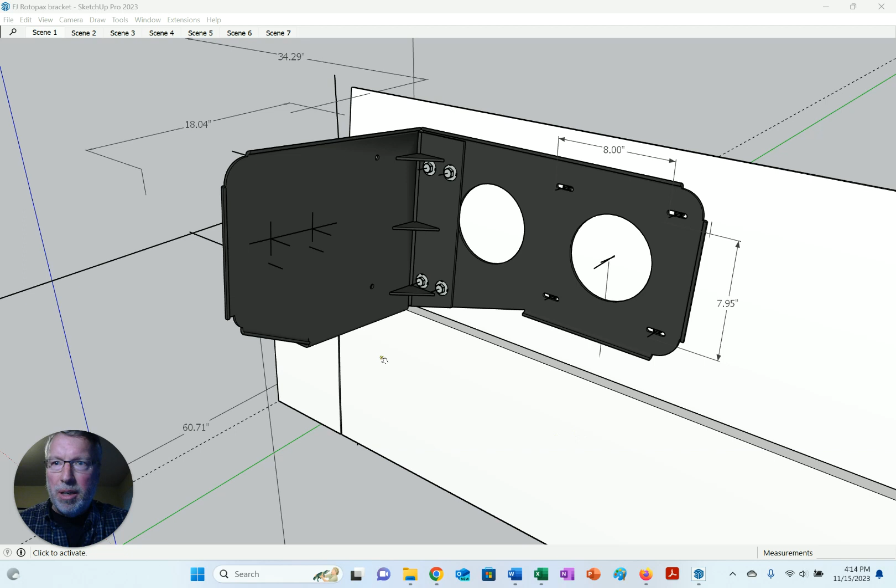And by the way, this back thing is my very rough take on the door of the FJ, which is curved, a little funky. I'll show you when I animate this kind of what I'm talking about in terms of how this actually works. So let's go to the next scene.

Okay, so now I've added the actual spare tire, and let me turn off my phone. It's already off. Good.

I'm showing this as a 33-inch spare tire. Right now I've got 32s on there, which is just the standard OEM size for tires for the FJ. But I'm going to be upgrading to 285 70 R17s, which are just under 33 inches. Call it 33, to be safe.

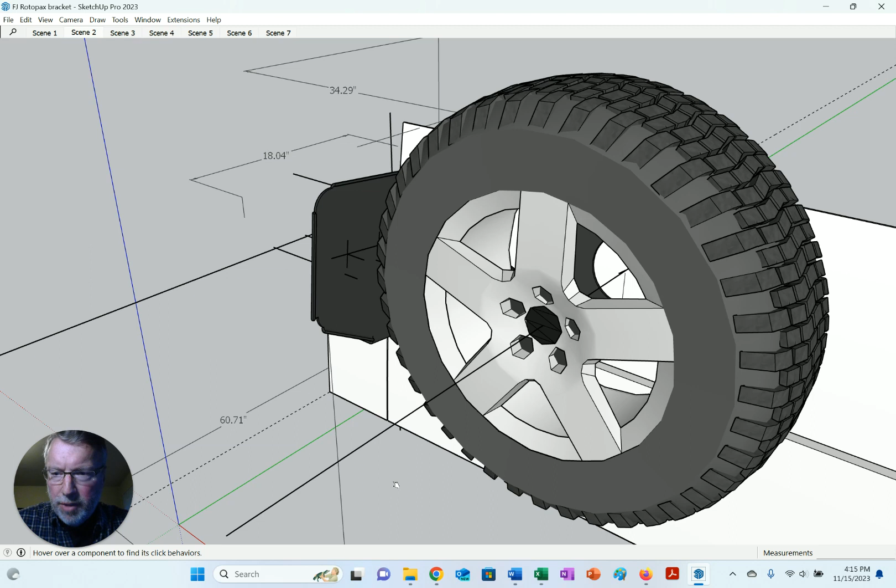Okay, let's go to the next scene.

So this is the other side. Part of this piece that gets bolted to the first piece has a little shelf with a welded gusset on the back, just to reinforce it. This not only provides some additional rigidity to this piece, but it also provides a little shelf and support for the high lift jack. So I'm going to show that next.

And by the way, all of this is relative to the tire, which is actually pitched back slightly. I don't know exactly what it is. I've guesstimated a little bit just to show from a drawing perspective, just to show the relationship between the two. It's not super critical.

In terms of what that is from a building perspective, because it's just going to mount to the door, it just needs to make sure it clears anything on the vehicle itself, including the part of the quarter panel that is not hinged. So anyway, let's show that high lift jack.

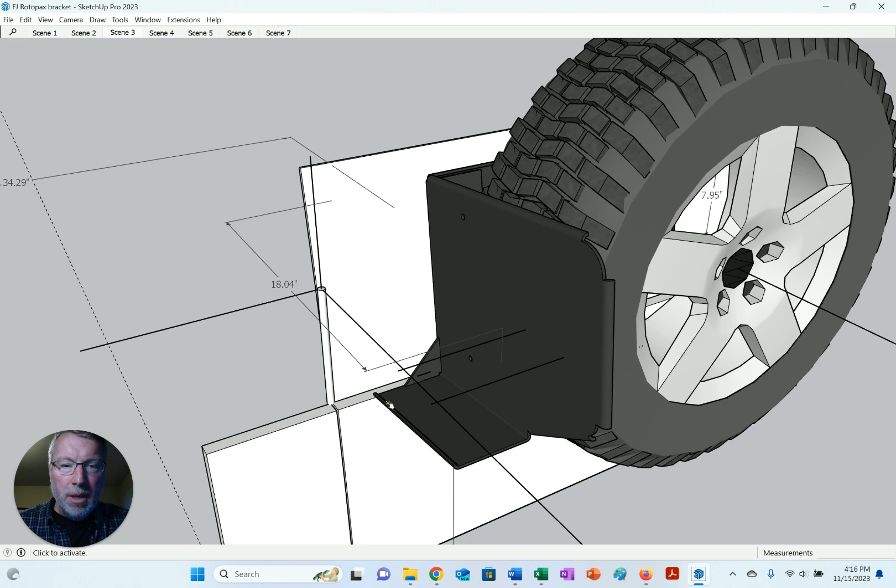So the high lift jack is going to sit on top of that shelf, and it's going to be bolted with eye bolts through the holes in the vertical portion of the jack into this vertical panel. I'm not sure how I'm going to lock this up, or whether I even will. I don't know yet.

When I'm not camping and just driving around in the FJ, the high lift jack will not be on the vehicle. It's only going to be on there if I'm going off grid or camping somewhere, and I know I'll need this for insurance purposes. So anyway, that's another thing to think about—how to lock this up.

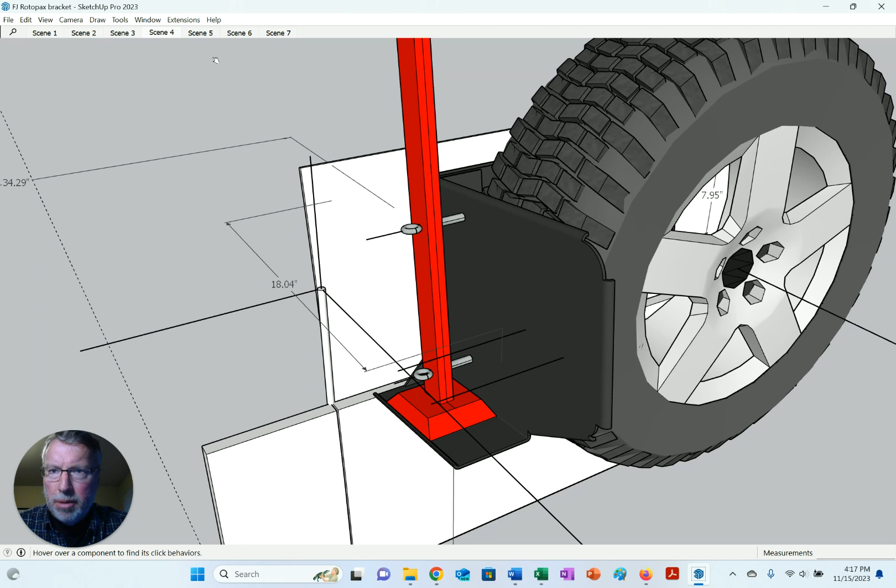So this next scene actually shows the RotopaX on there. It just kind of sits in front of the high lift jack, and it projects out a little bit, but not too badly. So let's show this actually rotating.

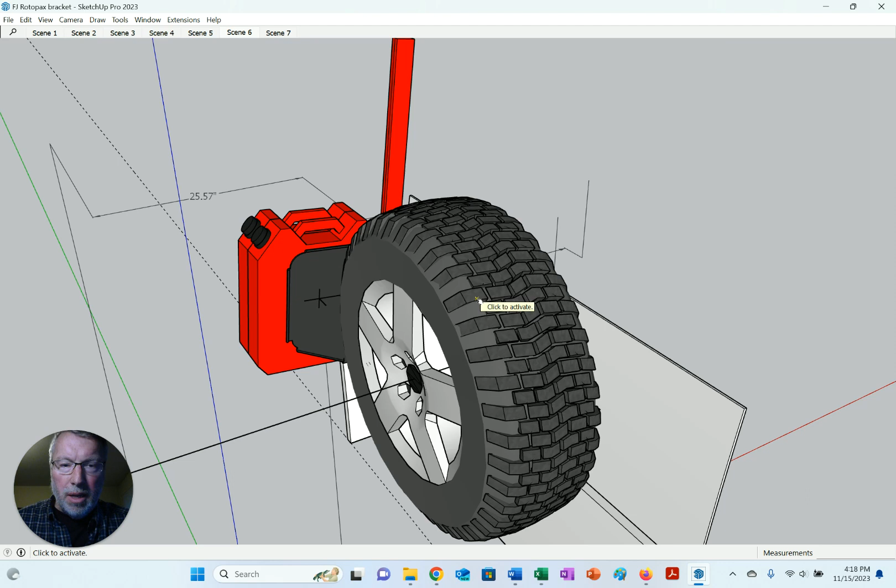You can see that the whole door hinges. On the next scene, you'll kind of get a sense of what exactly this means. So let's go to the next scene.

So this is actually a 2D view, which I always like to look at both in 3D and 2D, because it helps me understand two-dimensionally just how all this stuff is working. When you look at this, you can see the angle of the carrier versus the tire, which is close to vertical, call it vertical. But this has to be inclined because it follows the curve and angle of the door.

That's just the nature of the FJ. It has a kind of curved back door. It's actually really nice. Not going to really impact the design, but it's interesting to see this. I can actually animate this, so you can kind of see what happens there.

One of the interesting things about how this back door was designed - Toyota's engineers really have it going on, because this is a very complicated door. I've spent some time looking at it. It's very complicated. There's two hinges, top and bottom.

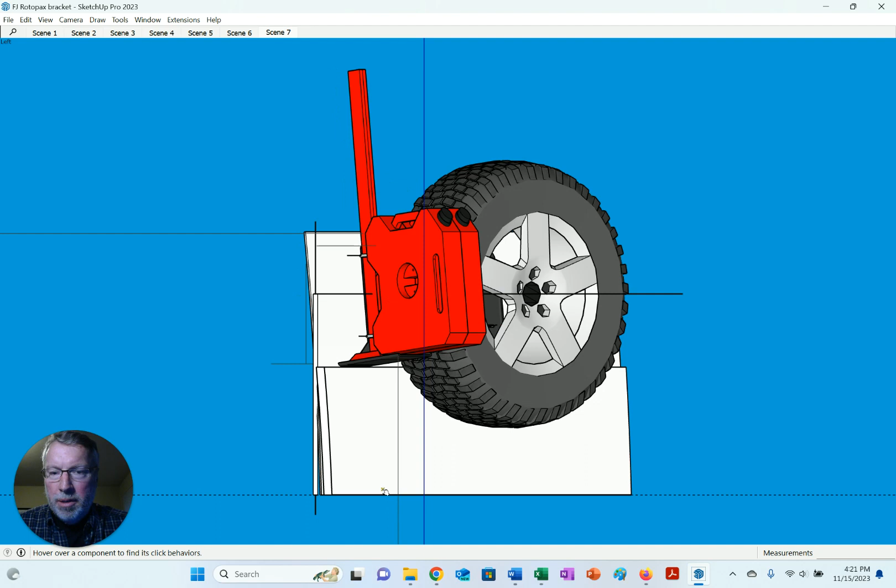Anyway, it's a really interesting hinge arrangement. So when the door opens, the bottom corner near the hinge is actually inside the plane of the door, or the opening of the vehicle that it opens out of - the top of it is outside.

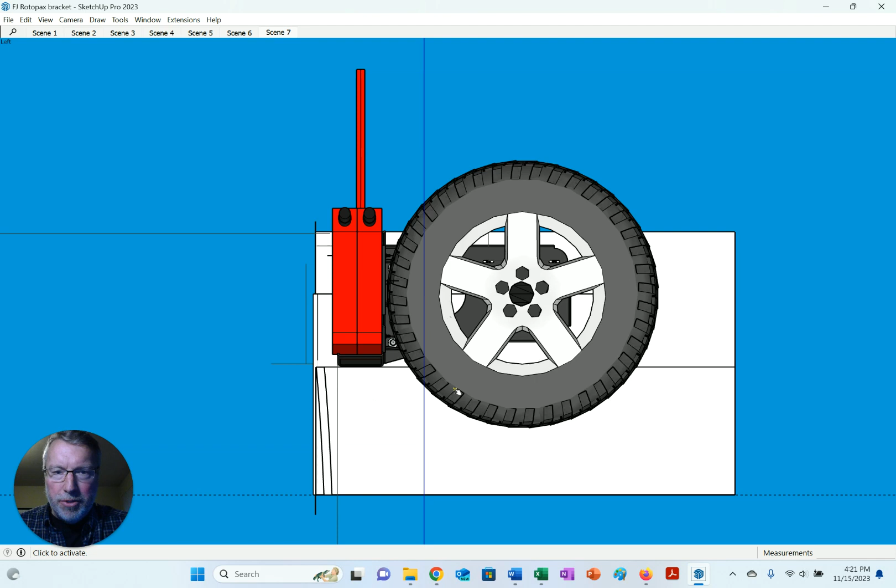So it's really kind of interesting. It's not the easiest thing in the world to draw, but I took a stab at it. I think it's pretty close.

So yeah, this is something we're working on. I don't know whether this is going to turn into a product that we're actually going to try and sell. Once I get the prototype done, get something that actually works, and get it on my vehicle, then I can take a lot of pictures. I can do some real world testing, make sure it's strong enough, make sure it's not going to break, and then just kind of share all that stuff and see if there's anybody that might possibly be interested in this, because I might try and sell it, but we'll see.

For manufacturing of this, I'm going to use the same vendors that I've been using for my awning brackets and other things, which is basically a three-part process where I go to one shop, get all the metal cut - they've got a laser cutter - and then have all those pieces sent to another shop that does all the fabrication work, does all the bending and welding, and then they send it to yet a third shop which does all the powder coat, and then it eventually gets back to me. So there's three parties involved in making all this stuff that I do.

Anyway, if I was doing 100 of these, it'd be pretty cheap. Since I'm only doing one, it's probably not going to be cheap. But we will see when I get there and I start making this thing.